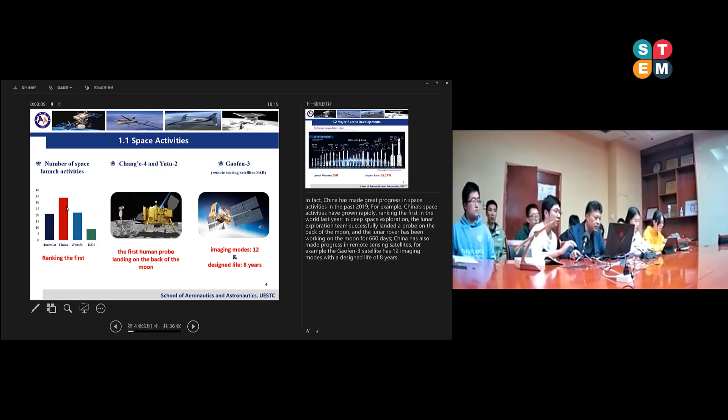China has also made progress in remote sensing satellites. For example, the Gaofen 3 and Gaofen 4. And also, for example, the Gaofen 3 satellite has 12 imaging modes with a designed life of 8 years. Look here, this is the space activities in 2019.

Okay. Oh, sorry. Sorry. No problem. Okay. So please wait a moment. Yeah. Because of network problems. Okay. Are you sure? Yes. Yeah, perfect.

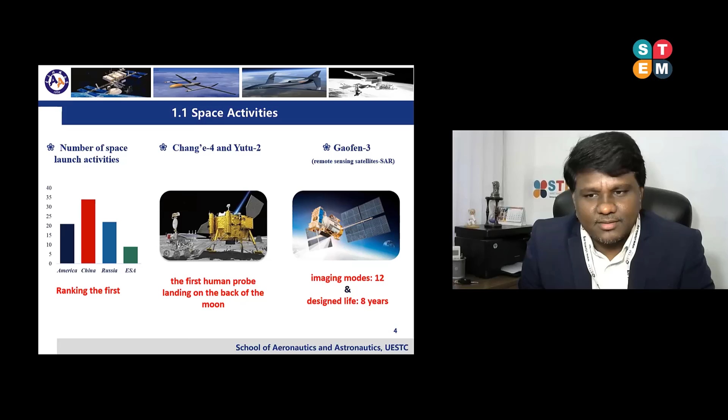Okay. So, in fact, China has made great progress in space activities in the past 2019. For example, China's space activities have grown rapidly like this. You can see China is here and Russia is here. Okay.

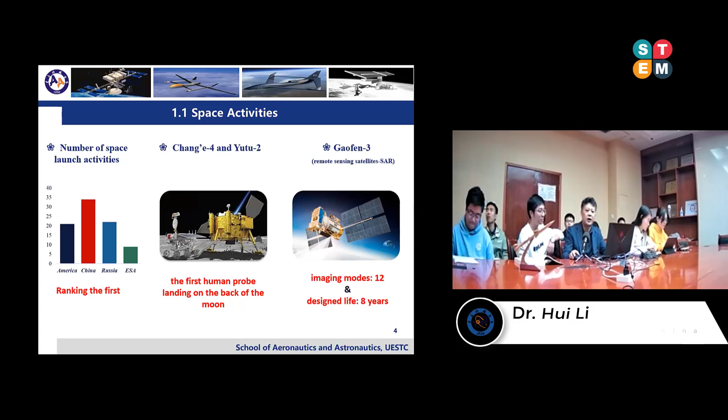Also, in deep space exploration, the lunar exploration team successfully landed a probe on the back of the moon, and the lunar rover has been working on the moon for 660 days. China also has made progress in remote sensing satellites. For example, the Gaofen 3 satellite has 12 imaging modes with a designed life of 8 years.

So look here, the Long March series rockets play a vital role in China's satellite launching, deep space exploration, and space station construction. Up to October 2020, the Long March series rockets completed 350 launch missions with a success rate of 95.14%.

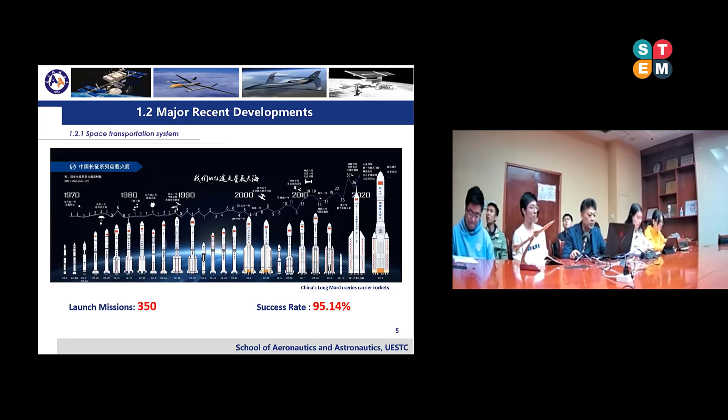And the Long March 5 is the newest model of the rocket in China. This Long March 5 has a total length of 53.7 meters here, and its carrying capacity can reach 25 tons. On May 5th, 2020, the Long March 5B completed its first flight mission. In addition, China is also one of the 3 countries in the world with such a large carrying capacity.

Here, the Beidou 3 satellite navigation system provides all weather, all time, high precision positioning, navigation, and timing service for global users. As this figure shows, it provides 2 service modes, open service and authorized service. The open service is to provide free positioning, speed measurement, and timing service in this service area.

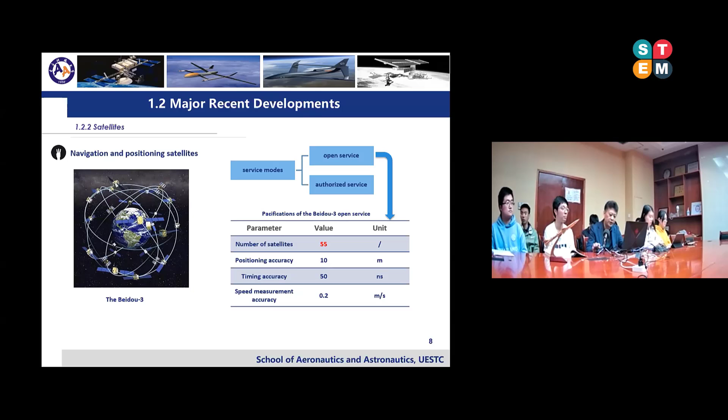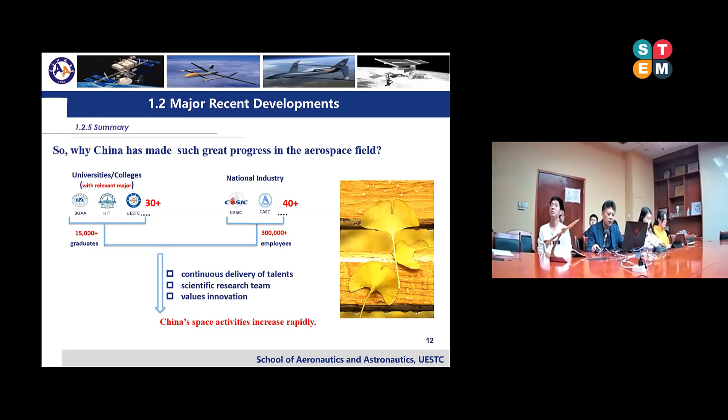Okay, next I will introduce one of my past works, missile rudder control system based on digital PWM. So I got a model of this, okay, Scud, that's a very famous missile in the world. So in the past, the rudder control system of missiles often used analog control systems such as the Scud. And nowadays, the control system seems to gradually become digital control like this.

Even though the missile servo control system has been developed rapidly, there are still some problems when it is applied in high-speed missile rudder control systems or high-speed flying objects. I think it's hard to have a good performance for a control system. So the first, I think, is adaptivity. It needs to operate under various harsh environment conditions, dynamic and static.

The response speed of the system is required to be fast, the linear range is as large as possible, and the zero position accuracy and torque matter. So the system must be able to output a large enough moment. Also, the volume, quality, and cost of the system have certain requirements.

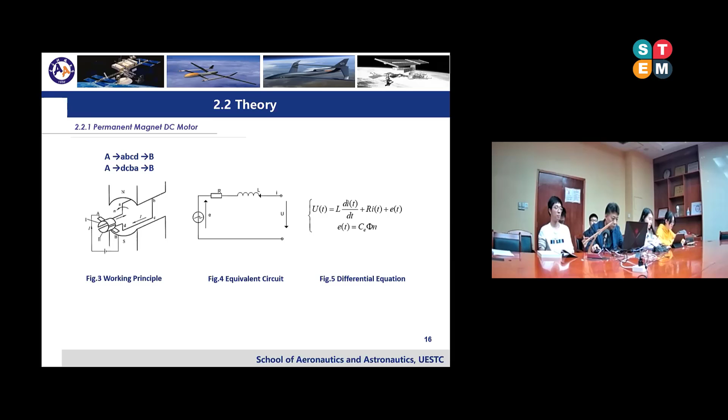So the control of the PMDC motor is generally based on PWM control, including PWM control that enables forward and reverse motor rotation, and PWM control that can only rotate in one direction. Reversible PWM control includes bipolar control, unipolar control, and restricted unipolar control. So we used unipolar control for the device.

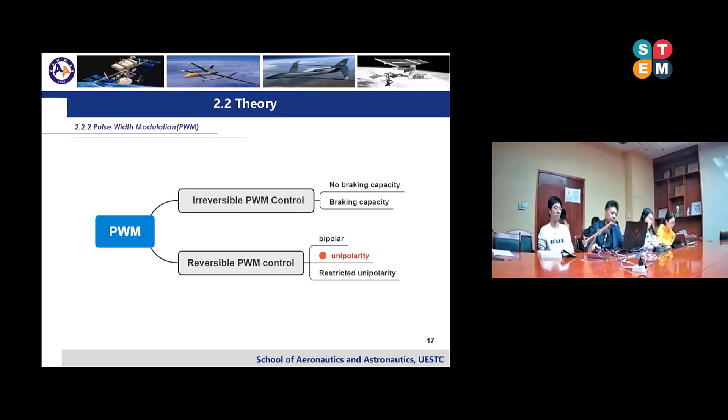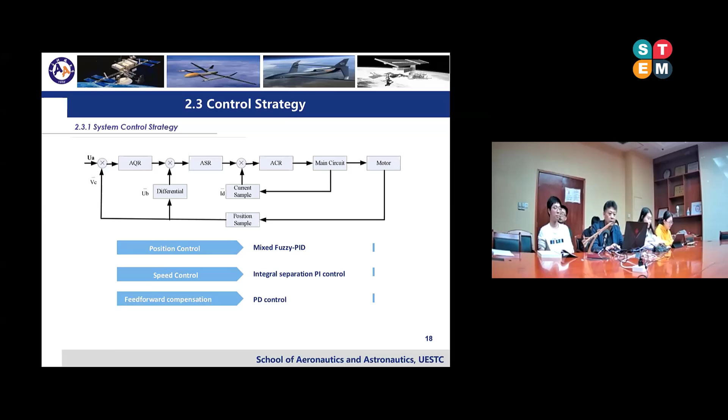So the servo system control algorithm includes the system position loop, speed loop, and the feed forward compensation. Position control used a mixed fuzzy PID algorithm. Speed control used integral separation PI control. Feed forward compensation uses PD control, like this. Mixed fuzzy PID, integral separation PI control and PD control. We use different algorithms to get better performance.

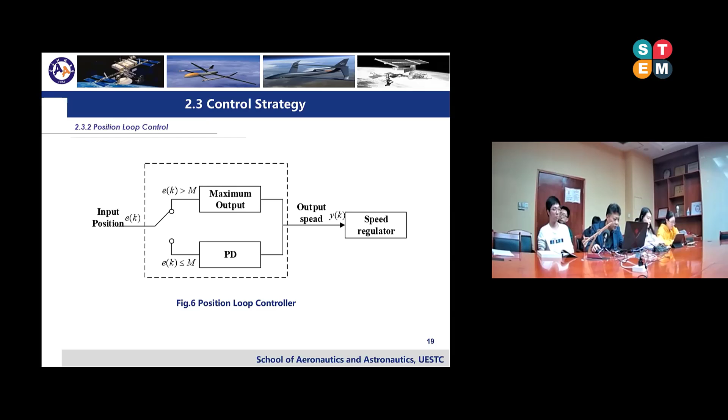So the position loop, as the outer loop of the system, determines the response speed of the servo system. In order to obtain excellent dynamic performance, this system position loop uses an appropriate PD control algorithm. The corresponding algorithm expression is shown in figure 6. This is the expression of the algorithm.

The introduction of the negative speed feedback is to ensure that the motor can run smoothly at the desired speed. The use of the variable speed integral PI control algorithm on the servo system velocity loop helps to meet the requirements of the system on the rate, speed, and other indicators.

The given signal of the system speed loop is the output of the system position loop. The speed feedback signal is estimated from the difference between the position feedback signals in adjacent sampling periods. This is the expression of this algorithm for the speed loop controller.

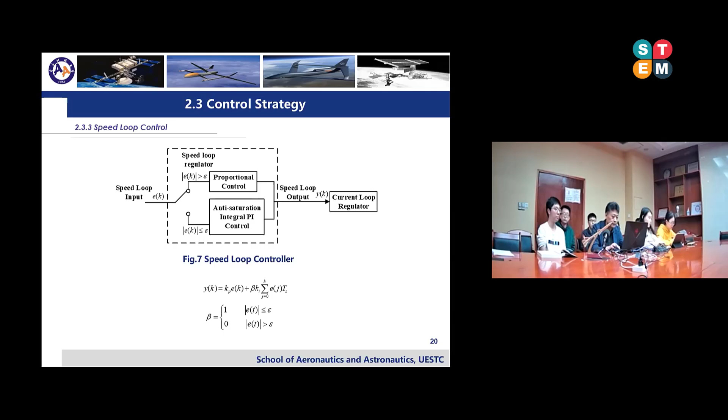And the power module is very important for the whole system. The structure of the system power module is like this. In addition to the H-bridge, which can directly use 28 volts, other parts like the isolated drive circuit module need the support of the 12 volt non-isolated conversion module.

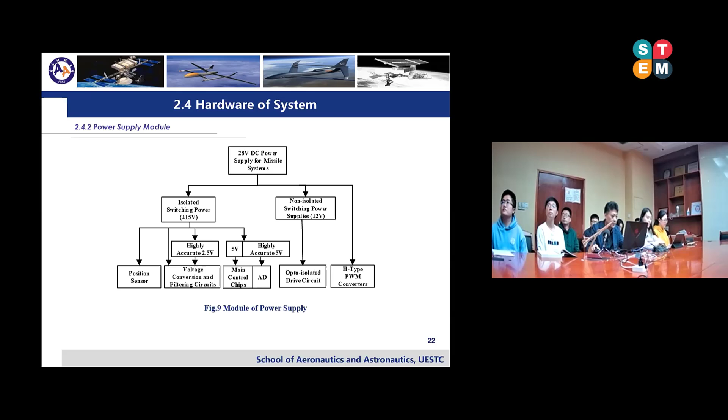The 15 volt isolated conversion module can support the operation of the position sensor, voltage conversion, and filtering circuit modules, main control chips, and AD. In one word, the power supply system is mainly responsible for the different voltage power supply requirements of each module of the rudder control system. So it's a little bit complicated because we use many different power supplies for different modules.

And in the H-bridge, the DC-DC PWM converter, which is under 4-quadrant operation, is adopted in the power converter circuit as shown in this, okay? The rudder can start and stop quickly and realize forward and reverse rotation easily. A duty cycle, okay? Duty cycle. The bipolar control model is divided into 4 states. Starting state: current follows loop 1.

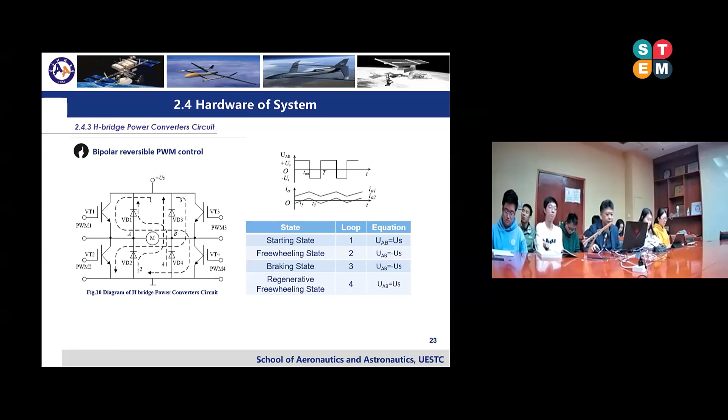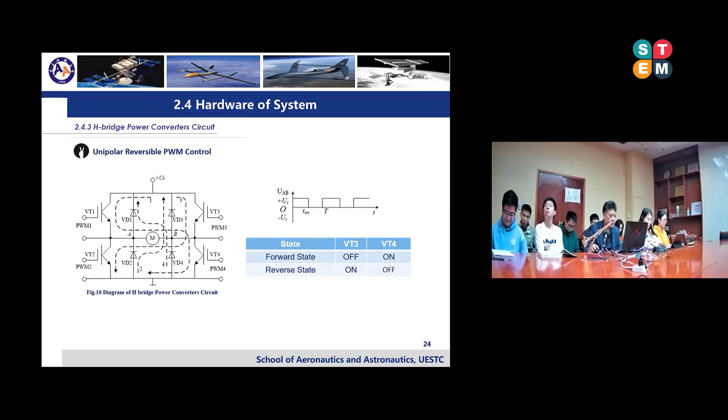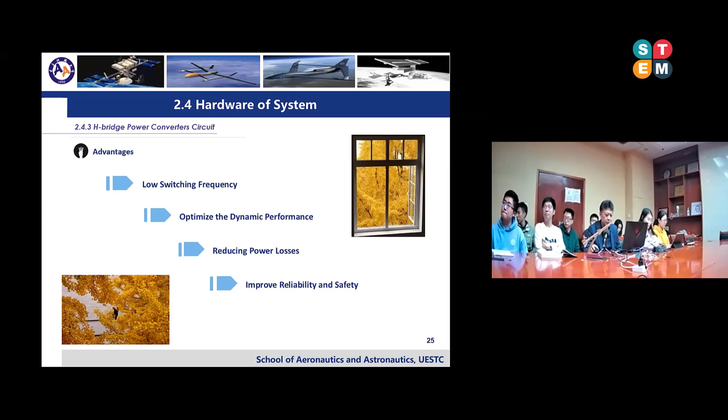Under the unipolar control, the current loops in much the same way as the bipolar model. The only difference is the switch that controls each stage: in the forward turn-on phase, VT3 is off and VT4 is on. In the reverse operation phase, VT3 is on and VT4 is off. Okay, the current flow direction is like this. Okay, that's the duty cycle. Anyway, the advantages of this approach are low switching frequency, optimized dynamic performance, reduced power losses, and improved reliability and safety.

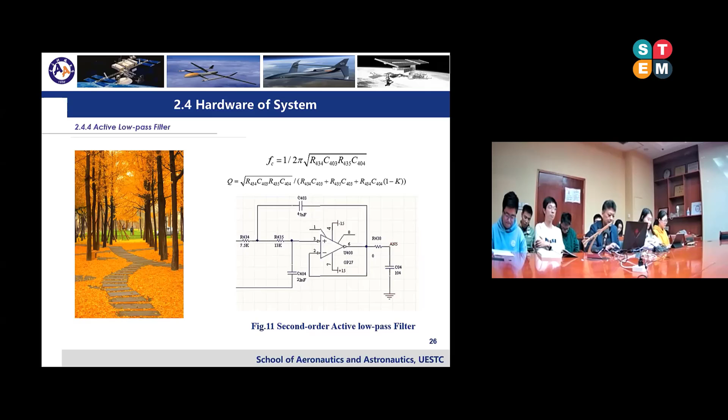So we also developed a digital filter. A digital filter requires software to implement it. There are three kinds of filter techniques: anti-impulsive average filter, as in the first formula. The smoothing average filter will add 1 to the end of the queue and subtract 1 from the beginning of the queue. The workflow of the compound digital filter is as follows.

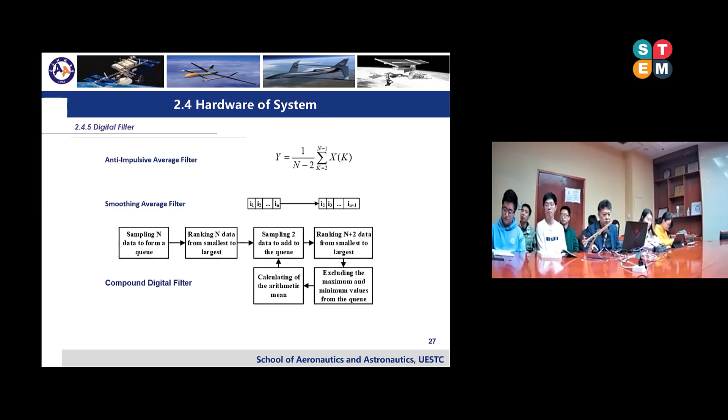Step 1, sampling n data to form a queue. Step 2, ranking n data from smallest to largest. Step 3, sampling 2 data and adding them to the queue. Step 4, ranking n plus 2 data from smallest to largest. Step 5, excluding the maximum and minimum values from the queue. Step 6, calculating the arithmetic mean. Then the procedure returns to step 3, like this, the logic flow.

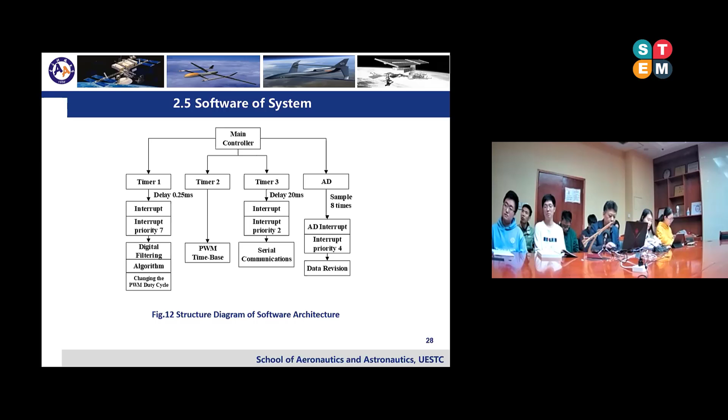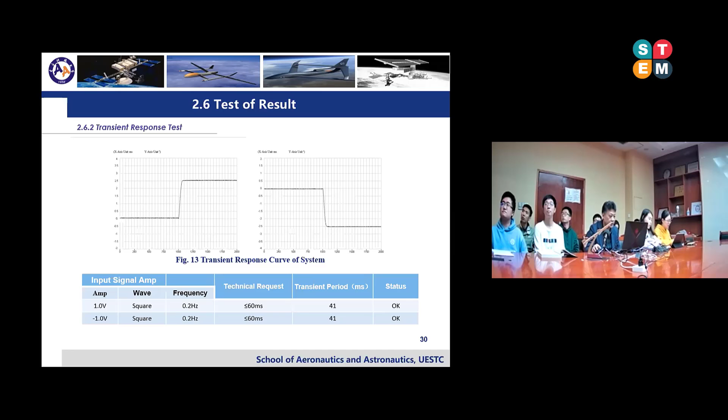And we also compare the amplitude frequency curves and phase frequency curves between bipolar and unipolar. They show that the amplitude frequency curves and the phase frequency curves are smooth and stable, just like this one. This is bipolar; I think this curve is not so good. And the unipolar, you can see the curve is very smooth.

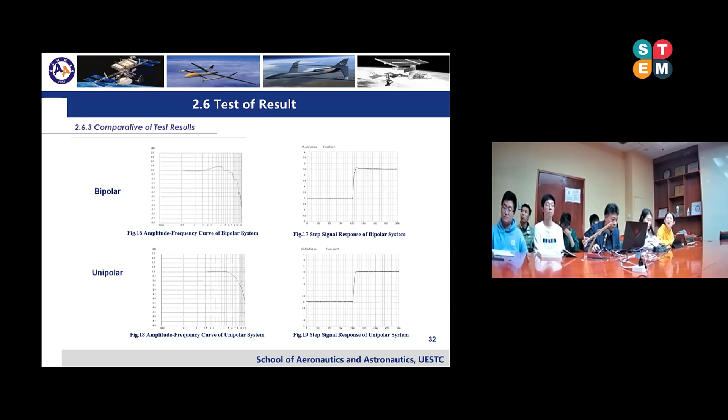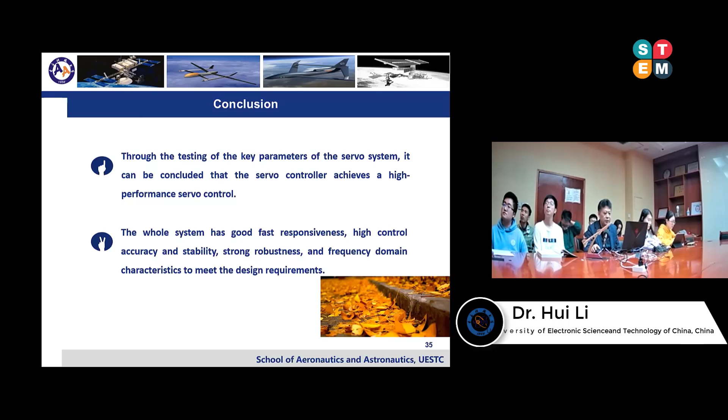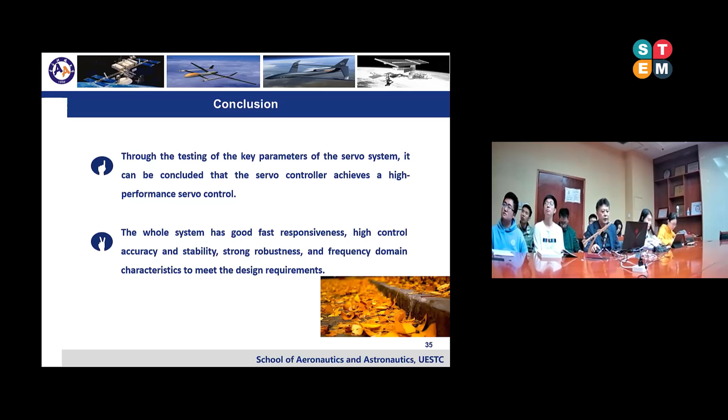So, conclusion. Based on the experiments conducted above, we conclude that our servo controller has high performance in the motor servo control system. The fast response, strong robustness, high stability, and precise control demonstrate the outstanding performance of the servo controller. Okay, that's all my presentation.